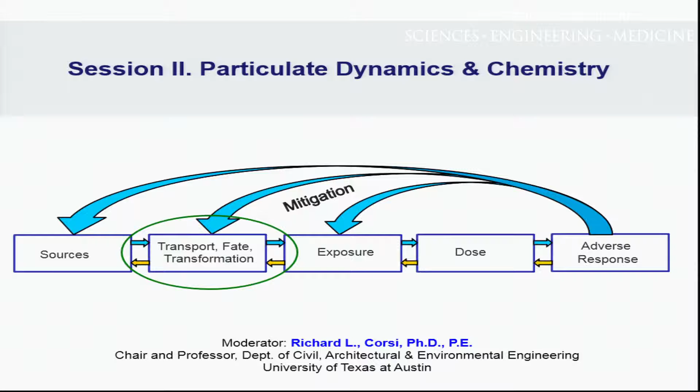I've purposely shown the circle here around our session overlapping with exposure and sources. We know that the nature of sources and where they occur, whether they're floor or coming out of a supply diffuser, affects fate and dynamics of particles. The person being exposed, by virtue of where they're located, can affect fate and transport of particles in the indoor environment through their thermal plume, and individuals also affect the composition of indoor particles, as you'll see in our session. And I want to point out, particularly for Jeff Siegel, who will be speaking on particle dynamics, that mitigation strategies can have a huge impact on particle dynamics.

So our three speakers, through various phone calls and emails, have tried very hard to craft a session that doesn't overlap too much with the other sessions. But I would keep in mind throughout this whole workshop that connections between these sessions and topics is very, very important. All right, so our speakers today have a lot of experience on this topic, and they're going to speak in a different order than what's in your program.

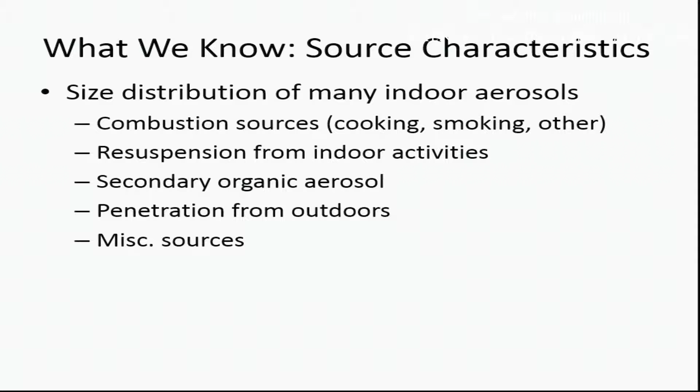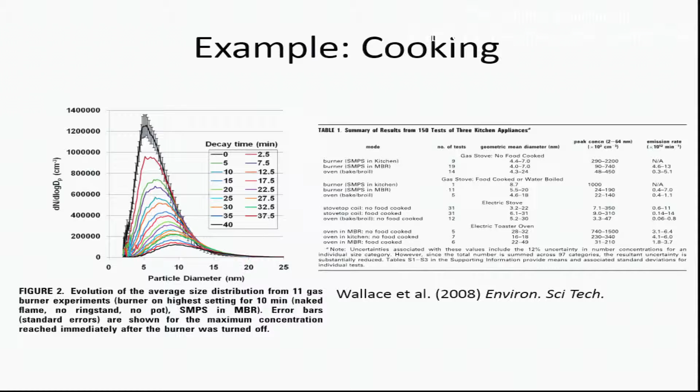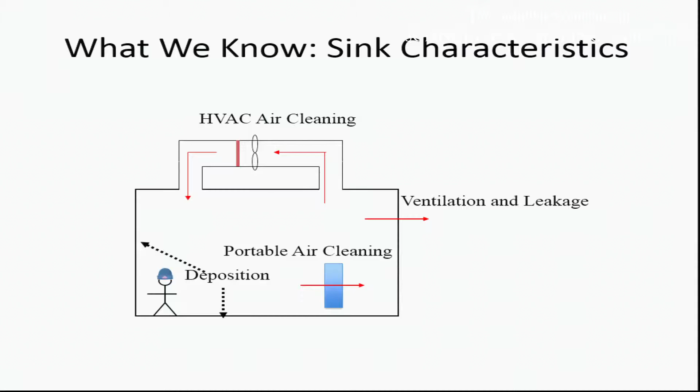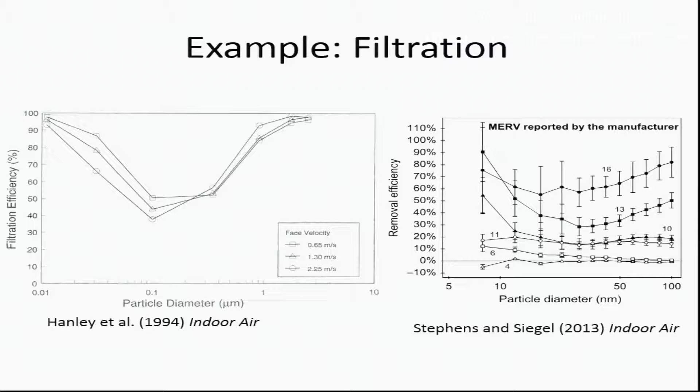Just one example of this, and I'm not going to dwell on it because it's going to be covered later in the workshop, but for example, there's been a lot of work done on filtration. We have size resolved filtration efficiency curves for many, many filters. We know many of the factors that influence those curves - for example, face velocity, as shown in the work by Jim Hanley and colleagues. More recently, we have work that shows filtration efficiency curves for much smaller particles, going down to the tens of nanometer scale or so. So filtration is another area where, again, questions, but we know a lot.

So if I move into the area of emerging knowledge, when I think about things from a building perspective, I group things into three areas, and I'm going to touch on a fourth. Those three areas are the impact of building surfaces, the impact of HVAC systems - that's heating, ventilation, and air conditioning systems - and the heterogeneity of indoor concentrations.

I'm not going to go into it in the interest of time and because it's going to be covered elsewhere - the impact of non-particle constituents on particle size and distribution - but I do want to mention that there are important things like ozone that can lead to particle formation, and other constituents in indoor air that can affect the size and concentration of indoor particles.

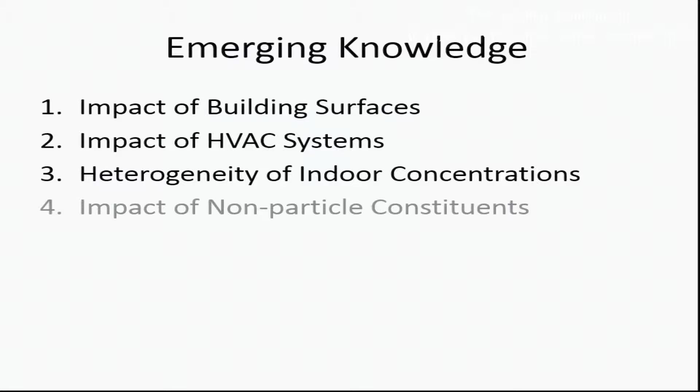So if we start with building surfaces, we all know that buildings have a lot of surface area, especially compared to something like an outdoor environment. We also know that there's a lot of very diverse surfaces in buildings. So even if you look around the room that you're currently in, you'll see probably some number of surfaces on the order of 100 or so that are easily visible to you.

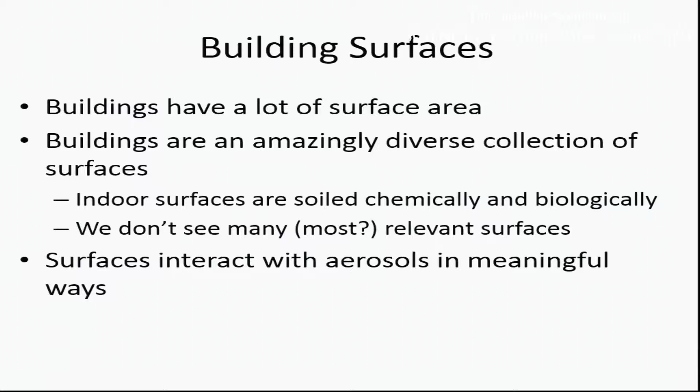And to add to that complexity, indoor surfaces acquire chemical and biological patina that is linked to other things that are going on in the environment. A point that's important to me, and that I'm going to come back to a little bit later in the talk, is that there's lots of surfaces that we don't see. In fact, many of the most relevant surfaces we might not even be thinking about when we think about indoor surfaces. And the reason that surfaces are important, and we've already seen a little bit of this, is that surfaces do interact with particles in indoor environments in very meaningful ways.

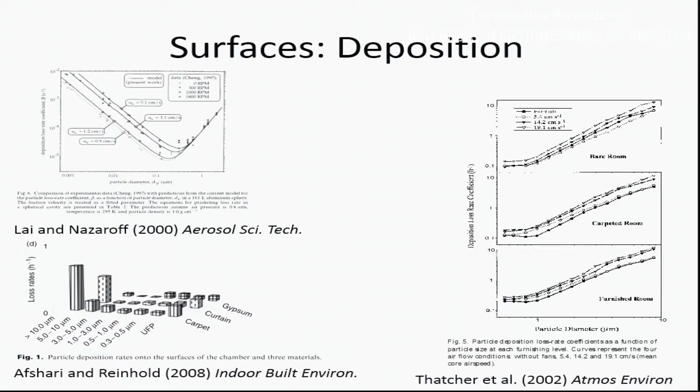But the reason I put this in the emerging category was actually pointed out in the Thatcher and colleagues article - that even though we know that surfaces have a big impact, it becomes very hard to actually predict something like a PM 2.5 deposition rate for an indoor environment. And that's been borne out by what we see in the literature. If we think about something like a PM 2.5 deposition rate, there are many articles in the literature that have either modeled or measured this, and you see variations for indoor PM 2.5 deposition rates that vary by approximately an order of magnitude or so.

And so, obviously, there's still a lot of work to be done to bring some of the theoretical treatment to be able to actually understand what is different about one building from another.

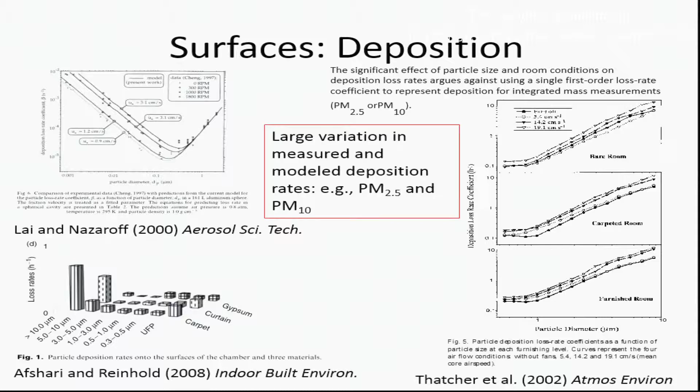One piece I would add to this is that I think one thing we have to get much more sophisticated in is our characterization of surfaces. Carpets span a huge range of very different materials in terms of properties like chemical composition, surface roughness, and so on. That probably plays an important role in aerosol interactions as well.

We heard a lot about resuspension, so I'm not going to spend a lot of time here, but we have measurements of different surfaces and of resuspension rates of particles of different sizes from those surfaces. We know something about surfaces and their interaction with airflow characteristics.

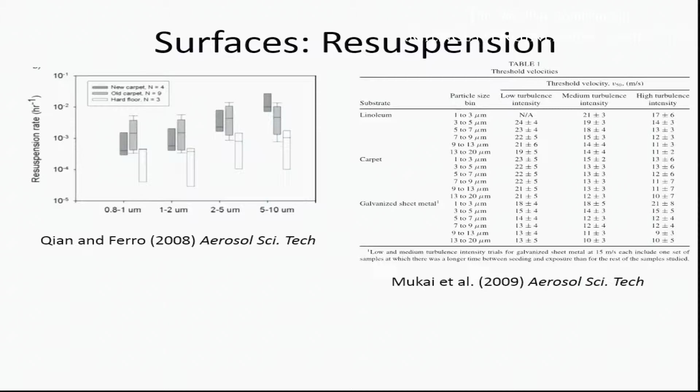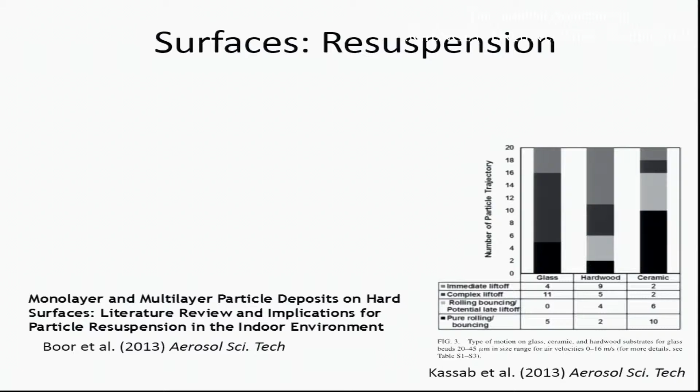Why I think this is an emerging area - Brandon already touched on both points I want to make. One is that we're very often not dealing with a particle-surface interaction. We're dealing with a particle-particle interaction because there's a particle already on the surface. Brandon led a nice review paper on that a few years ago. Another article recently started to look in detail at the mechanisms leading particles to detach from surfaces on different materials. I think that's the direction we need to think about in terms of what is affecting resuspension from the many different surfaces we see indoors.

The second area of emerging interest is HVAC systems. Forced air systems are very common - roughly all commercial buildings in the US have them, on the order of 3/4 or 80% of residential buildings in the US have them. Even in Canada, we see only about 2/3 of systems have them. It's really a huge set of interactions we see between indoor particles and HVAC systems.

For example, if we have a filter in a central forced air system, how that filter works to remove particles is going to depend on how often the system runs and how much air goes through that filter. If we think about ventilation, there's the amount of ventilation air, tied directly to the HVAC system, but also the operation of the ventilation system induces leakage, both in the ducts and in the building itself. There is also an impact on deposition and resuspension processes because of things like air turbulence and air velocities influenced by the HVAC system. HVAC components can act as a source directly by emitting particles or by emitting precursors to particles like ozone. They can also act as a sink, and there are several articles on deposition to HVAC components in the literature.

HVAC systems affect temperature and humidity and some of the environmental factors that affect chemistry indoors. And of course, they also serve to promote mixing in indoor environments. So really, if we want to understand indoor aerosols, we have to understand HVAC systems.

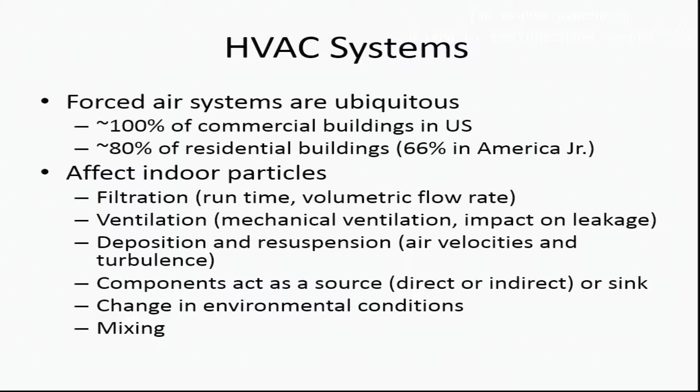Just to give an example of how far behind we are: one of my favorite HVAC parameters for residential systems is the runtime, how frequently the system runs. To my knowledge, the 200 or so homes represented in the 3 articles here are the only homes in the literature where we've actually measured the runtime. So of the 80 or 90 million homes in the US that have central forced air systems, about 200 of them we've measured the runtime. Not only that, it's all in the southeastern United States. Not only that, some of these are relatively short-term studies, a few days, maybe as much as a week. So we really know very little about this very important parameter.

The biggest study here, by Kristen Cetin and Atila Novoselac, was for a year in 161 homes. It's an unusual sample in that these are high-performance, energy-efficient homes, generally speaking. But you can see that within that sample of homes, we see a huge variation of runtime between homes, but also across the year. Depending on what season you're in - this is Austin, Texas - the air conditioning system runs much more in the summer than it does in the other seasons. So again, an example of a parameter that's really important that we know relatively little about.

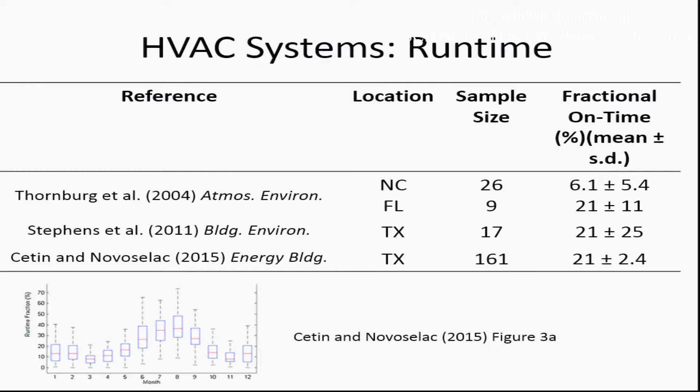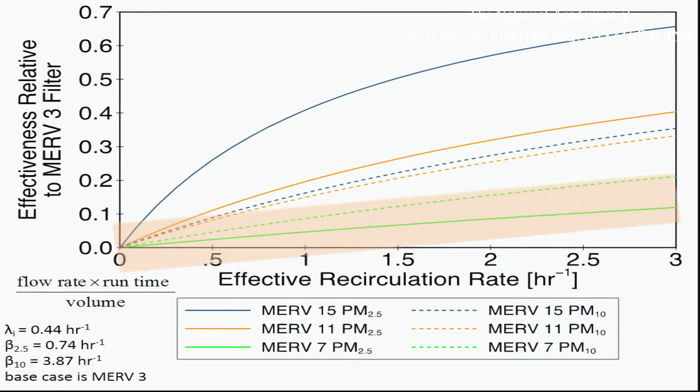Moving on to the third emerging area, the heterogeneity question, which Lynn already addressed. When we make exposure assessments to particulate matter or anything else, we usually make a well-mixed assumption for an indoor environment because that's the easy and mathematically tractable thing to do. But the same paper Lynn showed depicts a smoker sitting in different locations, with an exposed person sitting at close distances on a couch relative to the smoker. You can see hugely different concentration distributions of what they're exposed to—so even over very short distances near a source, you get very different exposures.

This also happens on the sink side of the equation. This is some work Atila Novoselac and I did, where we took measurements and modeling of a couple of different portable air cleaners and put them in different locations in a house relative to a source. What you can see is that the effectiveness of the air cleaner is really important depending on where it's placed in the house. That's in some ways self-obvious, but it also shows the importance of understanding particle concentrations and their distribution within buildings when we want to assess exposure.

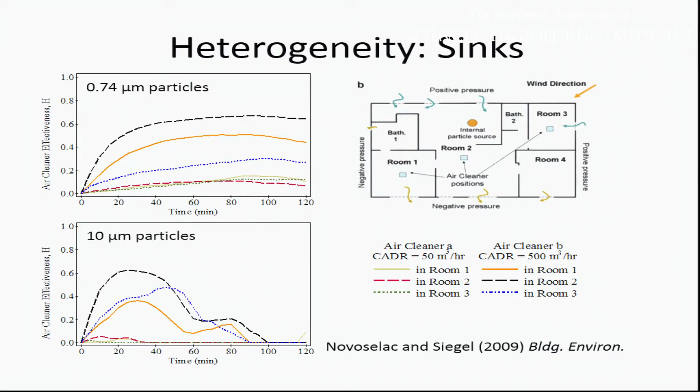The last point I'll make on heterogeneity says the same thing again. This is some work by Dongyan Rim and Atila Novoselac, where they showed that you get very different exposure—not just to particles, but to many indoor agents—depending on the proximity of the source, even at very close distances, because of the complicated fluid mechanics that occur around the human body, which can really affect the exposure that occurs.

So if we move from emerging areas into knowledge gaps, I want to make one central point: our knowledge of buildings is really insufficient to understand our exposure to particles indoors. I'm going to divide this into a few different knowledge gaps. The first one comes back to HVAC systems.

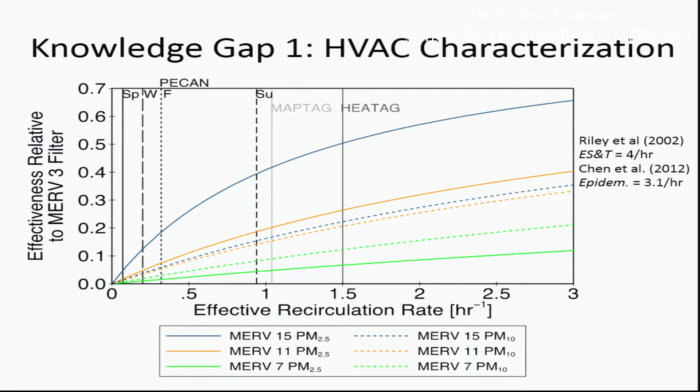I mentioned the runtime issue earlier. This is the same plot, but with a few measurements of runtime, both from some of the studies I showed you as well as from the gray literature. You can see that runtimes can, in fact, be quite small—that's the vertical lines here—and they can be larger. But the point I want to make is that if we look at how people have modeled runtimes and this effective recirculation rate parameter in the literature, we tend to assume much higher recirculation rates than actually occur in buildings. I think that's a very important point, and it points to the fact that if we're going to talk about mitigation, we have to consider the HVAC system.

Where these data come from: you can see that the air exchange rate varies by a factor of 4 or more over the course of the week that they took the measurement. This isn't even a big seasonal change or HVAC operation change—this is over a very short period of time with no occupant intervention, and we still see big variations in the air exchange rate. I think that's an area where we need to get a much better handle on the drivers influencing this.

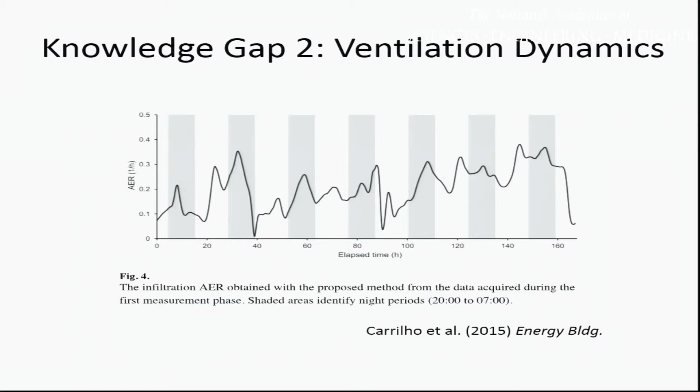The third knowledge gap has to do with sinks—we think of them as being very static in buildings, and they're not. This is some data from Matti Lehtimäki and colleagues from a building in Finland, showing the filter efficiency curve for a filter from when it's installed, at the top in the black squares, to over 9 months of operation.

You can see that its efficiency really declines over time. This is a well-known phenomenon from the perspective of filtration—there are a lot of filters in the US marketplace that remove particles, at least partially, by an electrostatic charge applied to the filter. That charge either is masked or decays over time, and the filter becomes less efficient. Even though this is well identified, and numbers vary, it's approximately half of the US filtration market that have filters that might behave like this. We really don't understand what's causing this and why the decline is huge in some buildings and much less in others.

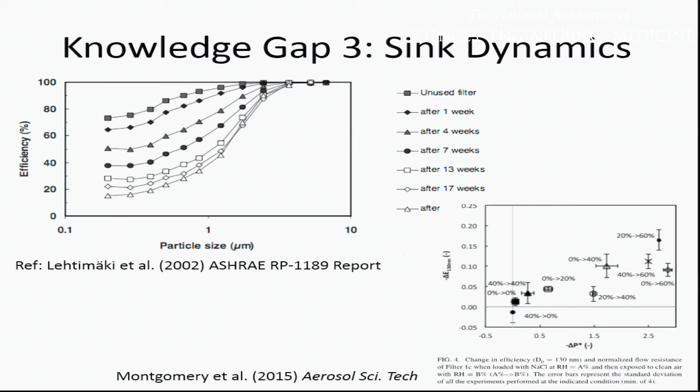We're just starting to get a glimmer of that. This is some work from James Montgomery and colleagues that came out last year, where they looked at changes in efficiency and pressure drop that happen on filters as a function of what they're being loaded with and the particular structures occurring on the filter as they load. I think this kind of fundamental research that lets us understand how our sinks behave is also really important.

The fourth and final knowledge gap I want to address is what I call unseen surfaces and spaces. Buildings are not just the rooms we inhabit—there's a lot of other spaces we don't see. Those of you in this room right now, if you look up, there's a drop ceiling above our heads, and that communicates very well with the space we're in. There are other kinds of interstitial spaces in walls and floors. In residences, we often have attics, crawl spaces, basements, knee wall spaces, all of which communicate well with the space and are essentially unknown from the perspective of either sources of particles or how they affect our exposure to outdoor particles.

I'll highlight garages at the end here. Garages are by far the most well-studied buffer space—there are many articles in the literature on transport of pollutants from attached garages to homes. Yet, if you look at those articles, to my knowledge only one of them measured particles.

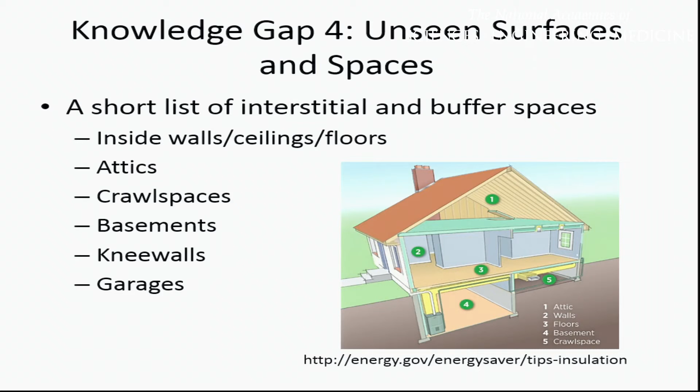Even though we know these spaces can be important, especially from an exposure perspective, they're largely unstudied. So what I want to finish up with here is one way we might address these knowledge gaps, using recent Canadian political history as a model. Until last fall, the past 9 years in Canada were a period of especially scientific darkness from a government perspective, and a lack of data, because of the administration that was in power.

Then this past fall, we elected this gentleman here. One of the first things—in fact, this was the very first policy announcement that came out of the government the day after the election—was that the long-form census, which had been abandoned by the previous administration and led to a real lack of data, was reinstated. There are rare times when I'm proud of my country, and this is one of them.

What I think we need to do is take that model and think about a really long-form building census. The idea is that there are many things about a building that influence aerosol transport and aerosol exposure indoors, and we really need to measure and understand those so we can be effective in mitigation. As a parting point, some of this is obviously done by scientists, but this is also an opportunity for citizen science and practitioner science. There are lots of people in buildings for many purposes over the day who could help us gather some of this data, and I think that would advance a lot of the questions we have about indoor aerosols. Thank you.